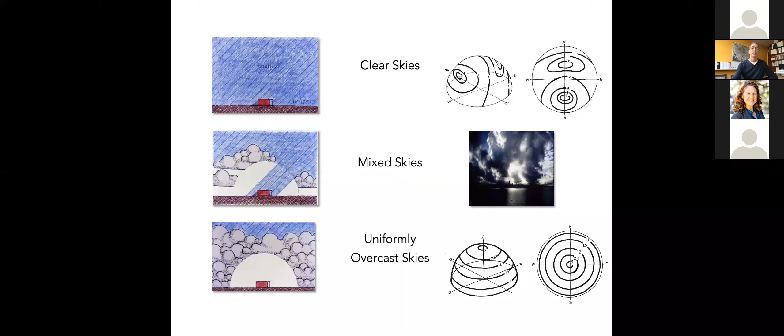And then at the other end of the spectrum, and we experience a lot of this in Seattle where I live, is this idea that on a uniformly overcast day, the brightest part of the sky is directly overhead. It's about 3 times brighter. And that's because you get to the sky much quicker going this way than you do going this way. And this is a real opportunity for us, especially under overcast skies, to think about how and where we want to bring light into our buildings.

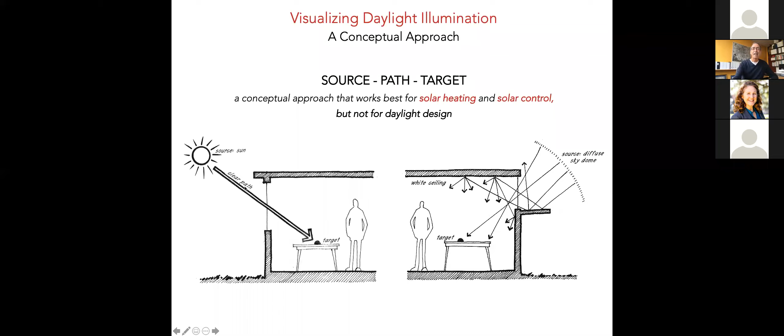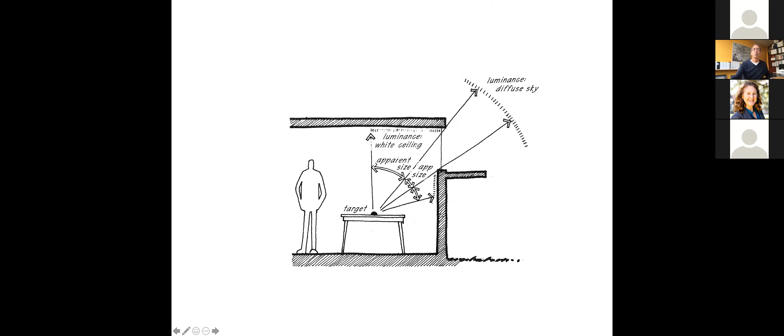So an approach that I'd like to put out there is one that thinks about all of the bright things in the environment that our target sees. And that can be the bright surfaces of the room around us. So that ceiling, this wall, and their apparent size. How much of the visual environment does each of these surfaces have relative to this target? And what is its brightness? And we can think of this as the luminance times apparent size. It's really a better conceptual model for daylight design.

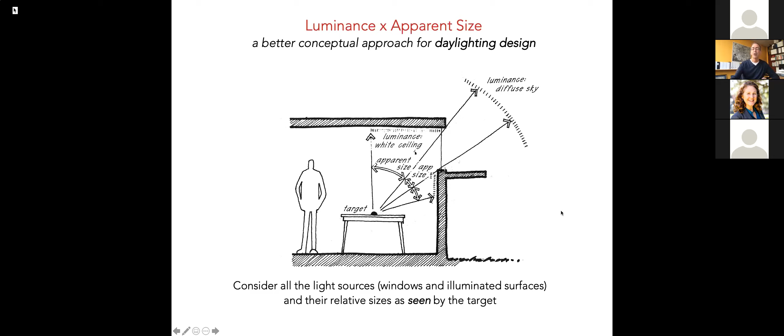What we do is we want to consider all the light sources, windows, illuminated surfaces, and their relative size as seen by the target. Now, at the end of Monday's presentation, you saw a whole bunch of really good principles about how to think about windows and those apertures, because these are kind of like light fixtures. They are light fixtures. Let's just extend that luminance times apparent size and think of all of the different ways we can create bright surfaces in our buildings.

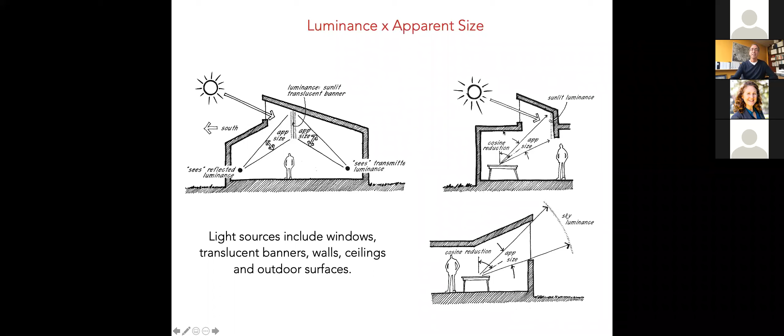So of course the window is a bright surface, and sometimes it sees the direct sun, but a lot of times it just sees the bright sky. That's what we're really interested in. But we can aim that daylighting to create as many bright surfaces in that space as possible for our targets to see. And this is an idea that our best lighting designers out there knew well.

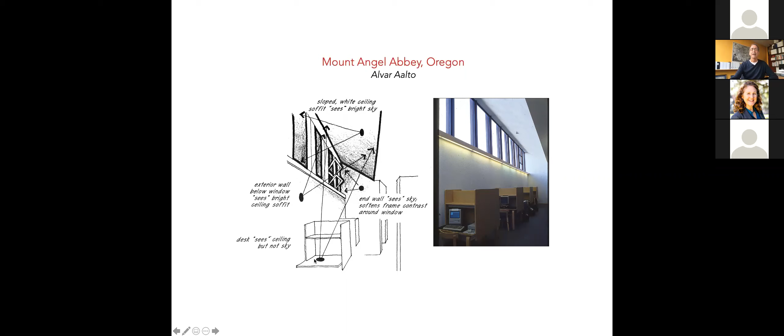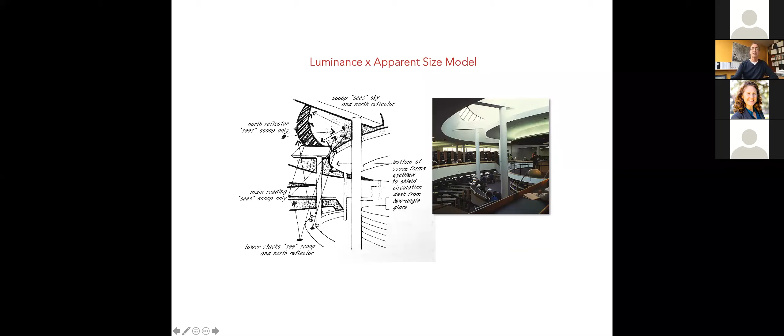We see that also playing out in the main area of the library, where these skylights are sculpted in such a way to create a whole bunch of receiving surfaces for brightness that can then be seen by these work surfaces down below. Aalto was a master of that. We see it in many of his buildings. This kind of sculpted roof that we see, in this case, this sort of sculpted scooped edge that's seeing the brightness out of that window. Same thing here, this sort of canted roof.

And one of the things Aalto loved to do was to paint these surfaces red, because in this northern climate, which is gray a lot of the winter part of the year, warming up that surface warms up the light as it reflects into this space.

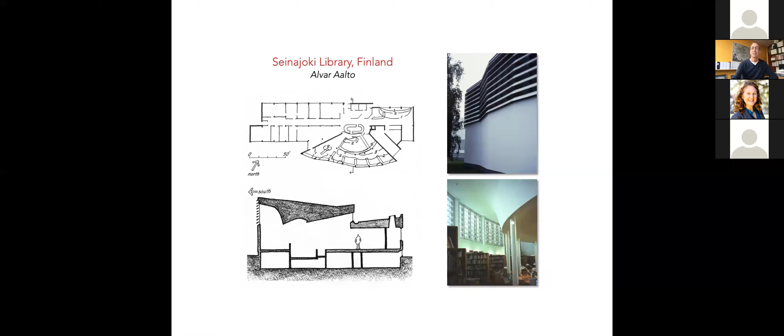I want to emphasize one more rule of thumb that you saw on Monday, and this idea that if we can put our windows as high up in a space as possible, the penetration of that daylight will extend further back. And we use this 2.5 times H rule. It's a rule of thumb. And as a rule of thumb, it's very general.

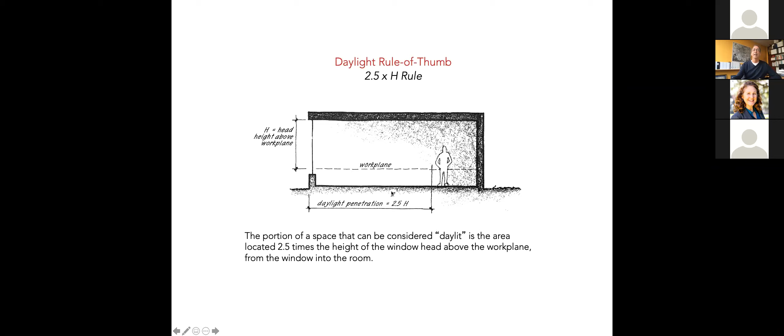Sometimes we think of the work plane, as Gail described on Monday, as our H. Sometimes we think of the floor plane. But the idea is to get the glass as high up in the space as possible to extend usable daylight into that space. Now, obviously, the size of that aperture is going to affect the quantity, but it's really the height of that window that guides how deeply into that space the daylight will fall.

That was another important principle in the design, which is in a living building, under the living building rules, you can't put an occupied workstation more than 30 feet from an operable window.

The architects were guided by that 30-foot principle in developing the floor plate. And in the final development of the floor plate of the Bullitt Center, the upper floors were pulled back from the edge, you go back from the edge to create this area around the perimeter that can be occupied by workstations. And then the core can be occupied by bathrooms and by meeting rooms and service spaces.

And the result is, as you can see here, in that perimeter zone is a high level of useful daylight and a high level of daylight autonomy, a principle that you heard on Monday, this idea that we can rely on daylighting, in this case, about 92% of the working hours across the entire year on all of those office floors.

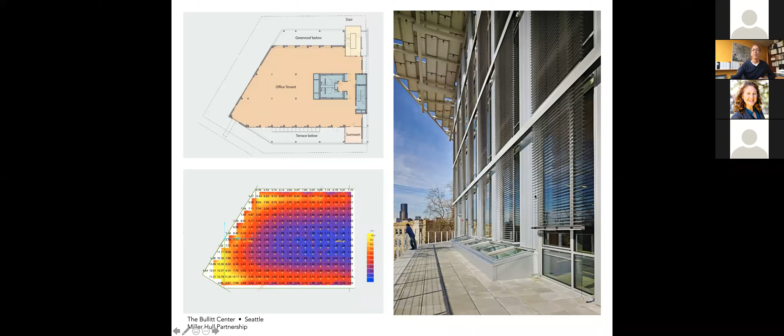The nice thing about these shading devices is they're also outboard of the glass, and these glass windows pop directly out about 8 inches. So the windows can open and close without interfering with the blinds coming and going.

So imagine if this window was facing south. What we would be seeing, hopefully this overhang would be shading that glass from direct gain, but we'd be seeing a shaded courtyard. It'd be significantly darker. But by looking out onto a bright, illuminated surface, this space inside is nice and bright. And I experience that every sunny day, which it is today, because this building across the street from my office is nice and yellow and bright, and I'm getting great daylight.

Okay, so why is daylighting such an important and powerful tool? I would make an argument this way. First of all, as you saw on Monday, we don't technically see light or lumens, that electromagnetic radiation coming from the sun or coming from an electric light source, this electromagnetic energy that passes through space. What our eyes actually perceive is luminance, the brightness of that energy once it bounces off of surfaces and reaches our eyes.

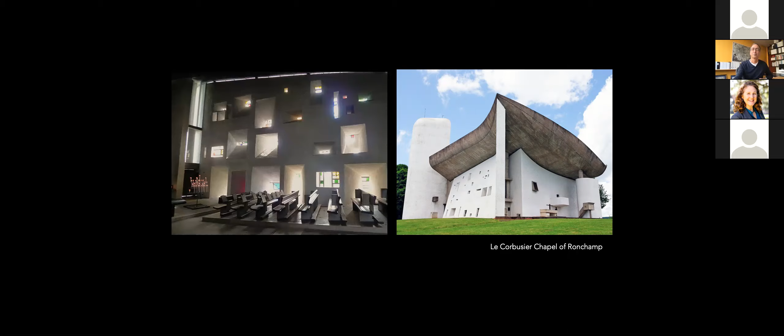So one of my arguments for the importance of daylighting in architecture is that this is our real opportunity for us to exercise this traditional relationship between light and form by connecting the interior with the exterior by way of the building's form, and most importantly, through its skin.

One of my favorite buildings is this church by Le Corbusier in France. And what Le Corbusier is doing in this is using the skin of the building as this interactive filter, this selective filter, rather than some kind of indiscriminate barrier.

One of our opportunities as daylight designers is to really enlarge our sensory palette. Now, arguably, we don't fully engage all of our opportunities for engaging our senses of sound, our thermal senses, touch, and smell. But light is the king of them all. It overwhelms all of our senses. And because light really gives form to our architecture, it is the principal medium of architecture. It is what makes architecture architecture.

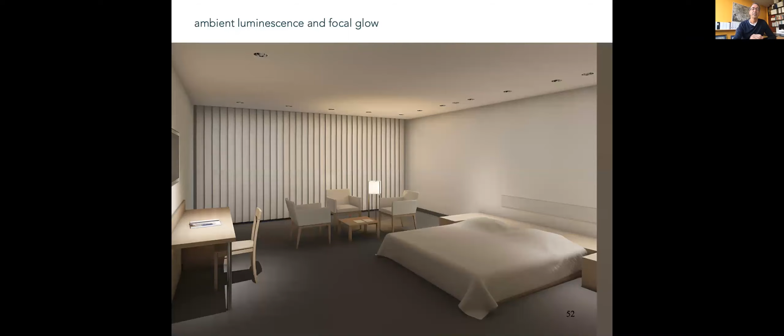Richard Kelly warns us that used poorly or used alone, plays of brilliance can be distracting. They can be a source of overstimulation, and they may just be evoking the wrong reaction. And Richard Kelly stressed that visual beauty is perceived by the interplay of all three kinds of light. And so if we want to use this idea to choreograph the illumination in our spaces, we want to know what kind of emotion or what kind of associations we're interested in, and then how to choreograph the light accordingly.

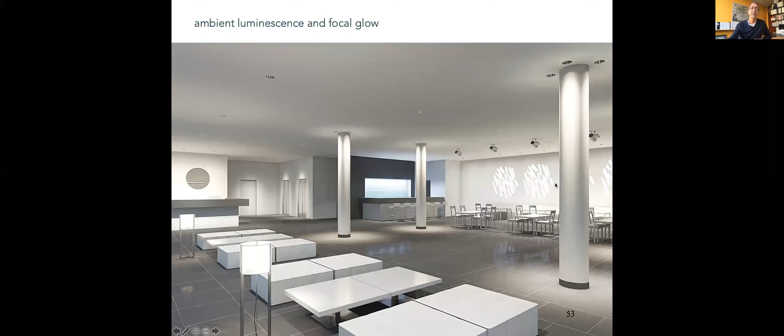So in this space, we see these sources of ambient luminescence, and then these recessed luminaires that are providing focal glow. And in fact, when we look out on the built environment, and especially spaces that are well illuminated, they're usually a combination of those three kinds and three characters of light. So we see again a number of cases of focal glow, these bright surfaces really being a source of ambient luminescence, and then little subtle glints of brilliance.

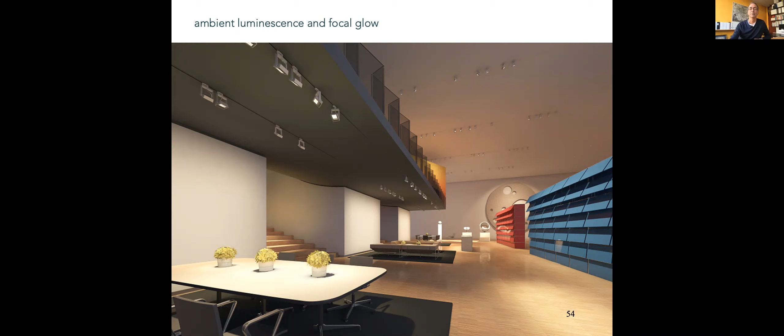Okay. I'd like to pause there for just a minute, take a breather, and see if there are any questions, or see if you have some thoughts on the question I asked at the beginning of the presentation about why lighting matters and what some of our opportunities are. Does anyone have any questions or comments?

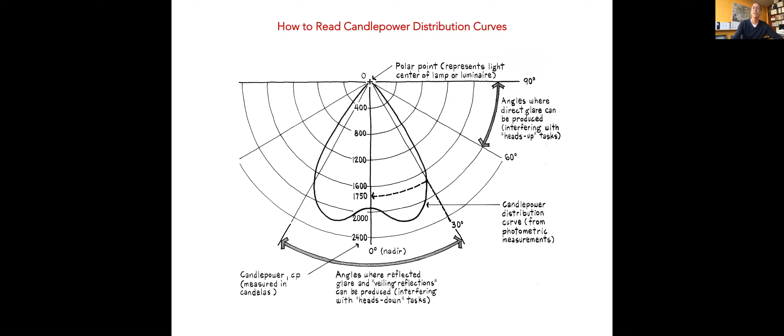So every light fixture you buy will have something that looks like that candle power distribution curve. And here are some more generic ones. The lights will also be characterized as being indirect. In other words, this is some kind of suspended light fixture, and all of its luminous energy is being directed up to the ceiling. Semi-indirect, the majority going up, a smaller proportion going down, or direct-indirect, where approximately the same amount of energy is going up or down.

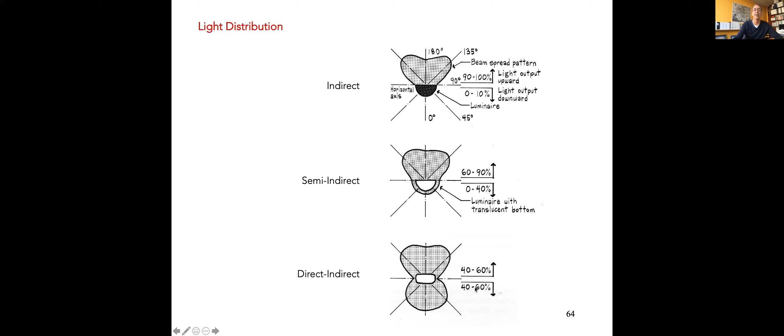Diffuse, energy is being distributed uniformly. Semi-direct, the majority being directed downward, and then a direct, and here are two different directs, one more of a spot and one more of a broad diffusing direct light. So these would be examples of recessed cans.

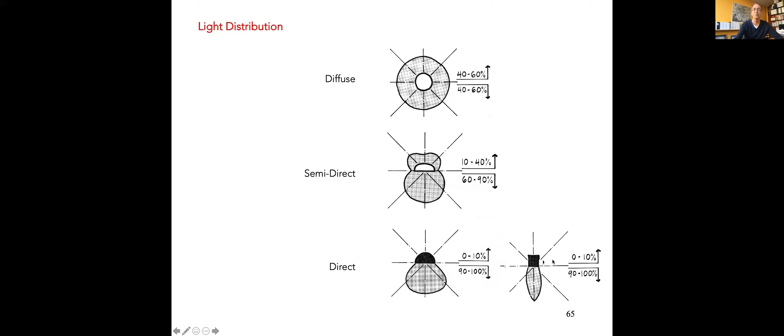So now some terminology. This is going to help you specify or select light sources or luminaires. There's this idea of valences and cornices. A valence is this sort of luminaire with a shield over the light source, typically a fluorescent tube against a wall. Light can go up and brighten these surfaces or wash the wall below it.

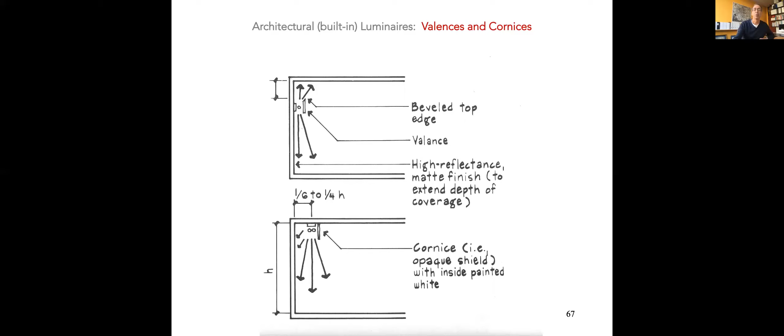Or a cornice. Skiers know this one. Here's a cornice, shielding the light source and washing this surface. So we can see this idea of light as a way to brighten surfaces. We want to create bright, luminous surfaces in our environment.

Here's some nice little rules of thumb for cove, and these slides will all be available afterwards. And a cove light, which is pretty common, is a way of concealing the light source to illuminate an upper wall and a ceiling. And this little illustration here describes some of the rules of thumb for the geometry of a cove lighting system that you can come back to.

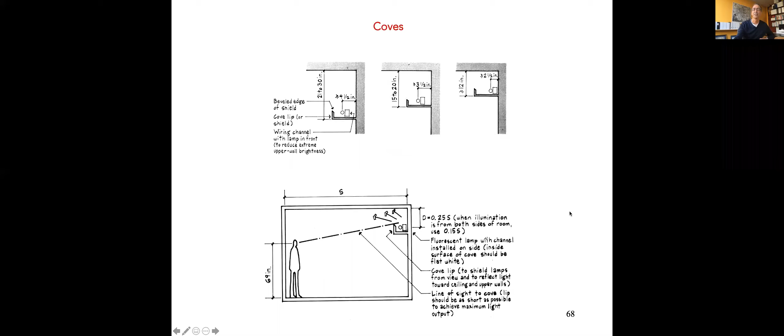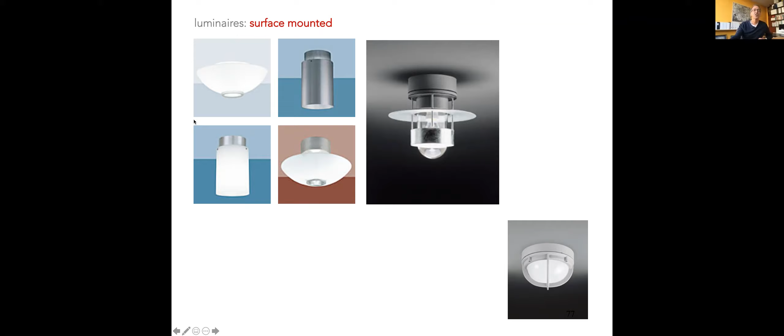The other thing we want to know is something about light and color. And light and color is a function of the light source. And if the sun is our light source, we see this full spectrum, the full electromagnetic spectrum of light. The receiving surface, and in this case, if it's a red surface, that red surface is absorbing a lot of the spectral content of that sunlight, and reflecting just the red portion of it. And that's why it looks red.

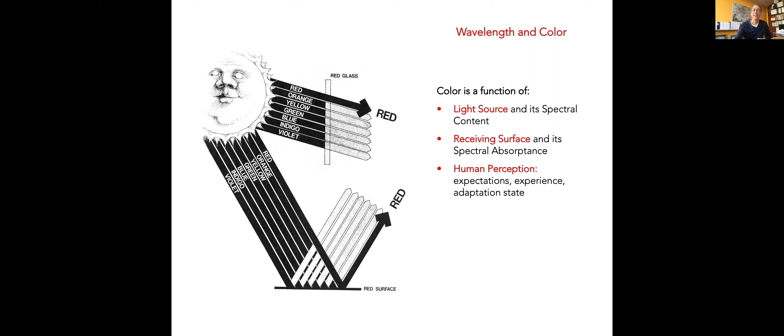And then the third part is our perception, our adaptation state, our expectation, and the health of our visual system. Now remember that when we're talking about the visible spectrum of light, we're talking about a pretty narrow part of the electromagnetic spectrum coming from the sun. It's this portion that's between about 380 nanometers to about 760 nanometers there.

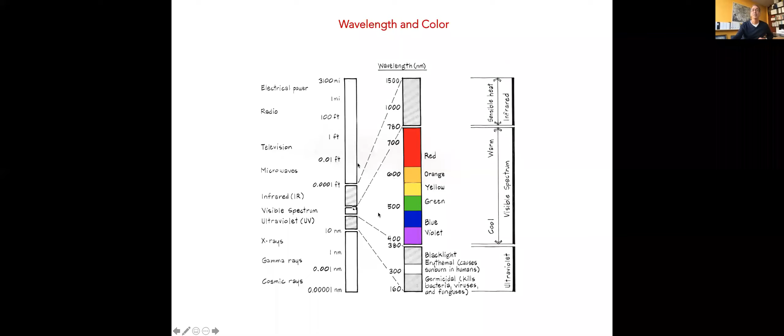And when we get to shorter wavelengths, we get into the blues or the ultraviolet. And when we get to these longer wavelengths, as we move all the way out here to heat, room temperatures, we get into the near infrared. So this is the red, orange part of the spectrum. This is the blue violet portion of the spectrum.

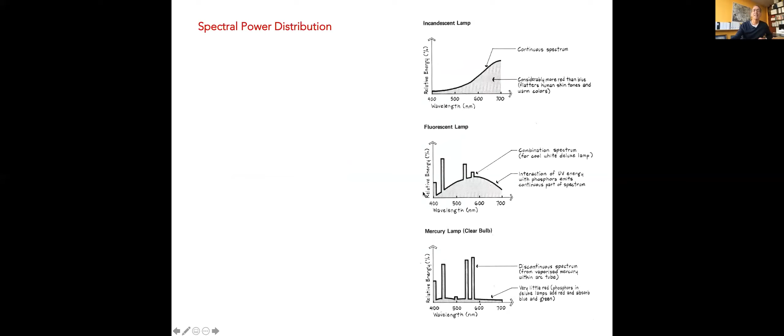And when we look at light sources, while the luminaire directs the light, the light source itself has a characteristic spectral power distribution curve. It's a graph of relative energy emitted at wavelengths by a light source. This is characteristic of an incandescent light. It produces a majority of its illumination in the warmer part of the spectrum.

Here's a fluorescent lamp, which has these odd spikes because the light that it's producing is being produced by interaction of an electric arc traveling down that tube, interacting with the phosphors that are coating that tube. And depending on what phosphors there are, you'll get a different shape here, and then these spikes of light.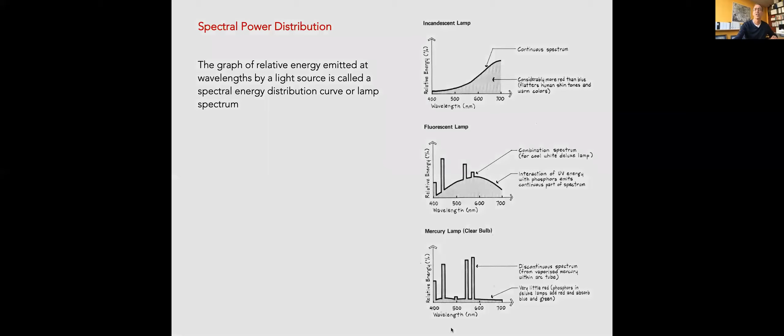And then when we get into these high intensity discharge lamps, this is an old fashioned mercury light, which I hope we never see again. It has very odd light, and this is why the light from it looks very strange. So if we look at those together, again, here is our incandescent light. Its spectral content is a lot more warm, longer wavelength.

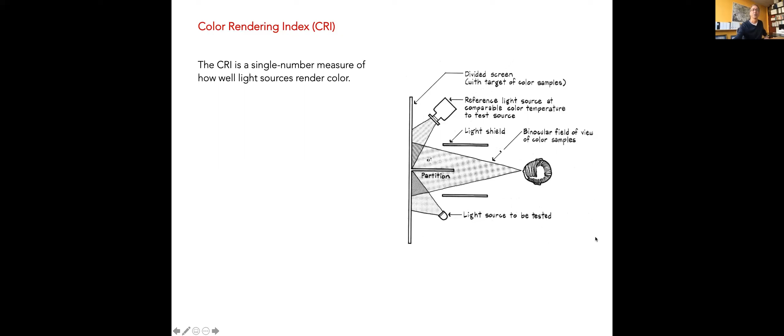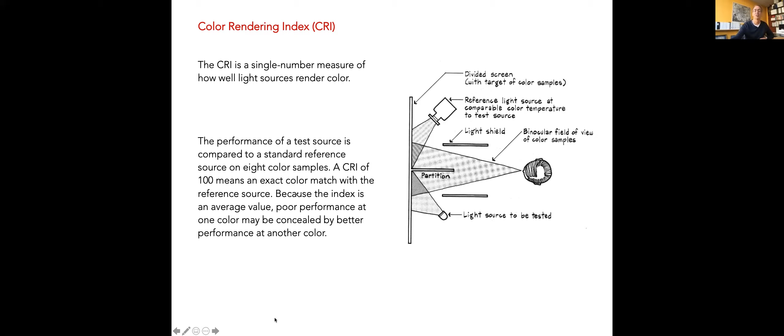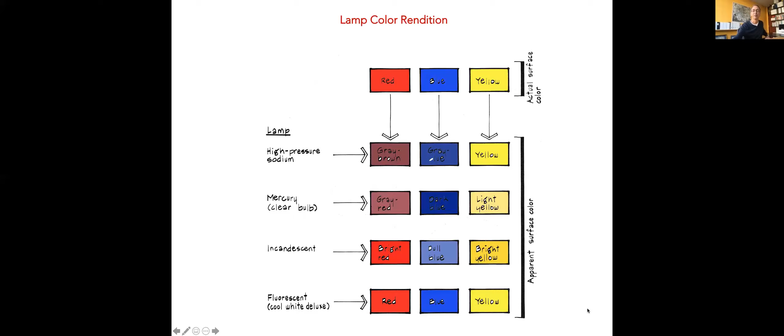I want to finish with one last element to help you with your lighting design now and in the future. And this is how to choose the source of electric light. And the measures that we're going to use are efficiency, color, life, and cost. And when I first studied light in undergraduate school, we had to learn a whole family of discharge lamps and our more familiar incandescent lights and how to identify what they were based on a set of numbers.